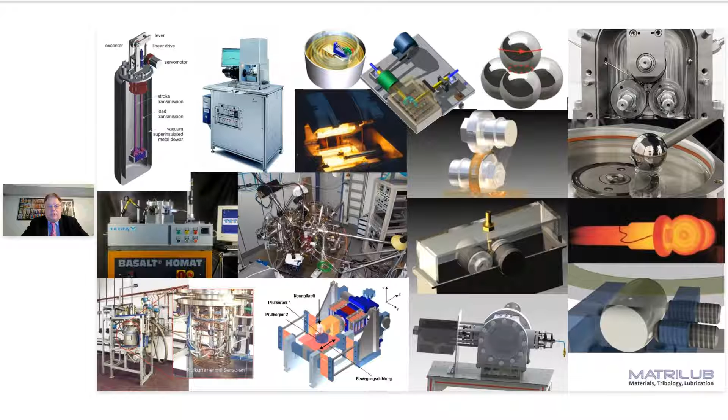The starting point is we have so many tribological test equipment flying around - test geometries, methodologies - that the question is why we need all these different test methodologies to characterize friction, wear, and load carrying capacity of lubricants and materials. The answer is quite easy: because we have such a large range of operating conditions and test geometries, and in order to have meaningful results you can transfer from a test equipment to the application, you need a lot of different testing machines to mimic those applications.

What happened in the last, let's say, 70, 60 years, is that some test equipment became standardized. This means that this test equipment or these test methodologies have reached a certain penetration and also acceptance. If you go back into the history, you'll see that the first tribometer may have been invented by Leonardo da Vinci, but the first tribometer where we can say you have a drive unit, you have something to measure temperature or forces, can be seen around 1850.

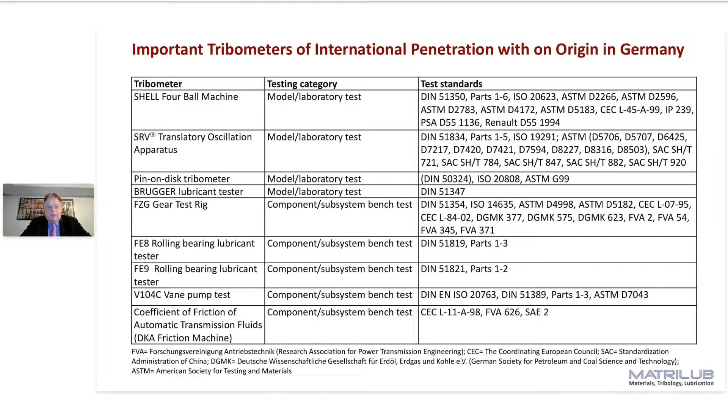Why do we now use test equipment? You can build a vehicle and test in a vehicle. This would be on top, category number 1, but this takes a lot of time. You need a full application, and it's costly and time consuming.

When you don't have an application yet, when you're developing for a future application, a lubricant or a material or a coating, then you must have a bench test or even a tribometer.

We have in Germany six levels or six categories. Categories 1, 2, 3 are application-oriented tests or practices, and then we have tribometers or lab scale test equipment up to small components, which are categories 4 to 6. But what is now the consequence?

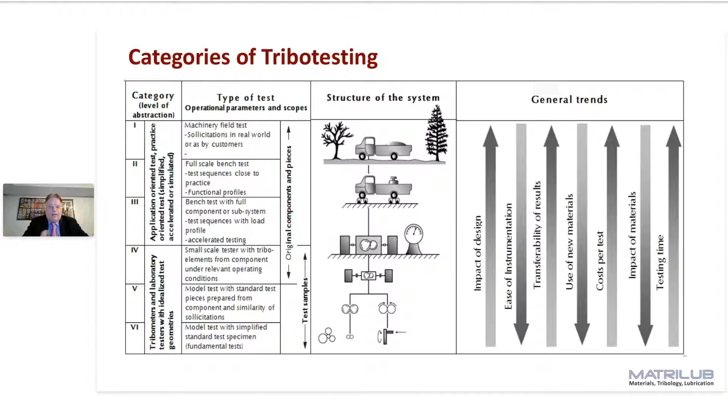Same for the testing time. If you make engine tests or vehicle tests, you need thousands of hours. In a tribometer, you can get meaningful test data after some hours about the functional behavior of a coating, a material, a lubricant, an additive, and also the interplay and interaction between these.

So what is a tribo system? The key point is that tribology or tribotesting is much more complex than analytical science, and the reason is that we measure a system property, or we measure functional properties.

Basically, friction and wear is everywhere in our life, in our industry. There is no industry where you do not have a tribo system. A closed tribo system consists, as you see in the center, of two tribo elements.

Tribo element 1 can be the primary part, and tribo element 2 can be the counterpart. At least in Germany, it is defined that tribo element 1, the primary part, is the element which is continuously in contact with the counterpart, while a surface element of the counterpart comes repeatedly into contact. This means a bearing shell in a sliding bearing is tribo element 1, and the rotating shaft is tribo element 2, because the bearing shell continuously touches the shaft, and a surface element of the shaft comes periodically into contact.

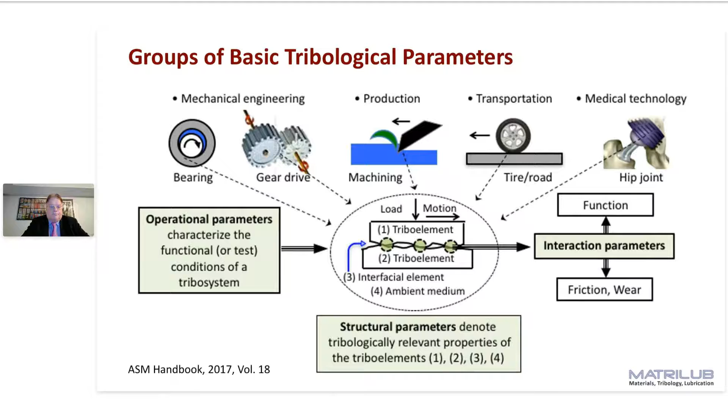A tribo system is a chemical reactor. You have operating conditions which go into the contact, and at the end you can have friction, wear, or a function coming out, and in between you have losses, especially heat from friction and also from wear particles.

Coming now to tribometry, you see here the bordered limits of a tribo contact in a tribometer or test chamber. We have two surfaces which come into contact. They are loaded, they receive normal force. Depending on the geometry and elastic properties of the material, this results in an initial Hertzian contact stress. You have a sliding speed or velocity, either rolling, slip rolling, or sliding, unidirectional or oscillating. You have ambient temperature and a test duration. These are the key parameters.

The outcome is, by means of a friction sensor at any time, the friction force. You can measure the wear of both elements, or of one element, by different techniques. Same for the temperature and also electrical properties like contact resistance, impedance, phase shift, permittivity, tangent delta, arcing, and so on. At the end of the test, you can use these specimens for surface analysis to see where the changes occurred.

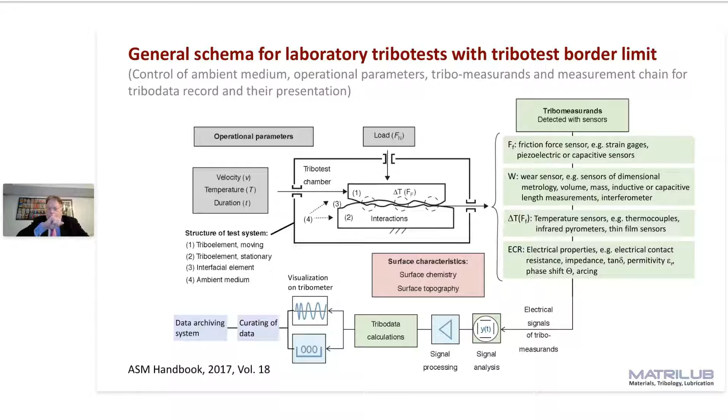At the end of the day, all these measurements are electrical or digital ones. They go into data processing, into a computer, and during the test and at the end of the test, these results and properties are visualized and shown on a screen. In the near future, the next step would be curation of your data. You must check if the tests were valid, if you have to correct data, and at the end the data will be archived in a data archiving system, which is more and more important in multinational companies who have globally different sites or labs operating different types of machines.

The real abraded volume can be completely different, and here comes the first problem in tribometry. Imagine these three wear scar diameters were generated with three different oils. You report the same wear scar diameter, and in consequence you conclude all three oils have the same wear protection. But in reality, if you use a stylus or optical microscope to determine the real wear volume, you see there is a significant difference in wear volume, so all three lubricants don't offer the same wear protection.

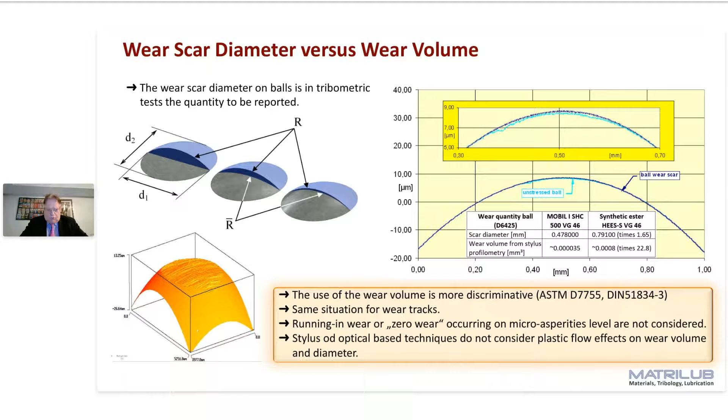So it is also possible to determine wear at this level, but here you have the problem: were the changes in topography caused by plastic flow of the microasperity, or really by an irreversible loss of material? So, finalizing—the first takeaway is that if you only look at the wear scar diameter, it can be misleading, and one should instead look at the wear volume.

If you look at actual research on super or supralubricity, you go down to 10 to the minus 3, and if you consider rolling friction, you go down to 10 to the minus 4 for the coefficient of friction. This makes it complex and complicated from the metrological point of view to mimic all in one test equipment, which is nearly impossible to do. This gives you an indication why you need so many different test equipment or test machines which can be adjusted for different load ranges.

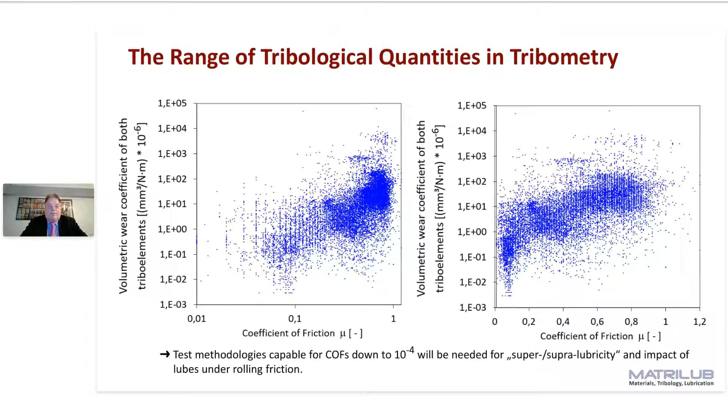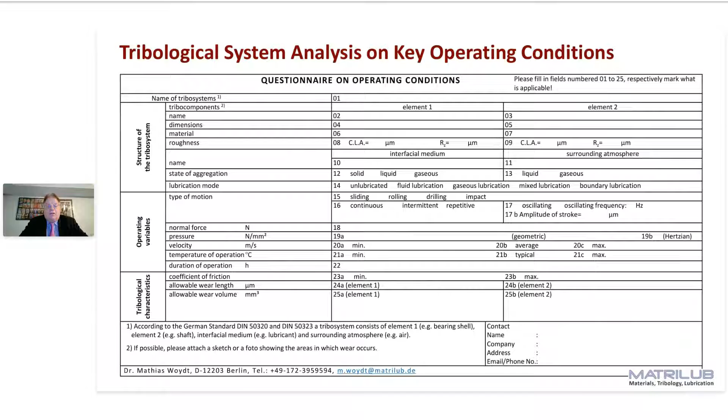So if we go back to these diagrams, you see a wide range of friction coefficients and wear rates. The question isn't whether a test result anywhere is good or bad, but whether the test result meets your tribological system analysis. If you have an allowable wear rate, all test results should be below it. So by selecting results, it's not a question of good or bad. The only question is whether you meet or do not meet what you analyzed through this questionnaire.

A very important point in tribotesting is the so-called overlap ratio. The overlap ratio, epsilon, is a ratio between the permanent contact area, in this case the red area of a flat pin, divided by the total contact area, which is the wear track on the disk. One tribo element is in contact all the time, while a surface element on the rotating disk has some vacations during the test.

What happens is better shown here. You have the contact zone. In the contact zone, the tribofilm or the oxides, whatever may have been worn, come out of the contact, and in this contact-free time, this can be regenerated, replenished. It's logical that when you increase the speed, you may come into a situation where you wear more of this tribofilm than it can rebuild. This also explains why often you have an impact of the sliding speed on test results.

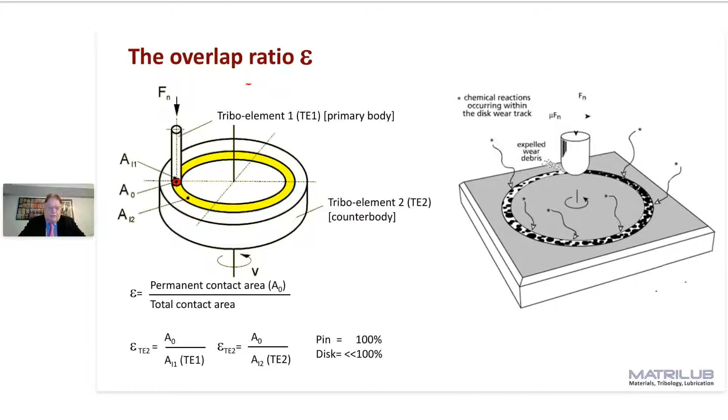At a certain point, you have a low wear, high wear transition.

One outcome from the tribological system analysis is the so-called PV diagram. PV means a couple can afford a certain product, a certain combination of pressure - contact pressure times sliding speed, and we mean here not rolling speed but sliding speed in meters per second. If you look into this schematic diagram, all lines or regions represent a transition border from mild wear or low wear to high or severe wear.

It means even at a very low speed, 0.01 meters per second, there is a maximum nominal contact pressure you cannot exceed, because the material begins to flow in the tribo contact. Even with very low contact stress, if you go on the x-axis to high speed, 10 or 20 meters per second, you cannot exceed this sliding speed, because the microasperities may melt, evaporate, or creep. So you have two border limits which can be predicted, and in between you can exchange pressure and velocity.

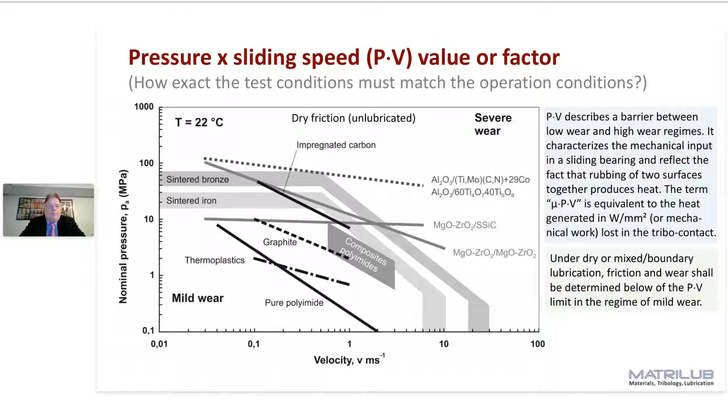This means you don't have to exactly match the operating conditions in your application, but you must be sure that during your test you are in the mild wear region of the couple with respect to the application. When your load, speed, or PV value in your test equipment is too high and you are under severe wear, you can never have results which can be transferred to an application. So it's important to know these PV values of a material, a couple, a lubricant, and you must not have exactly the same PV value in your tribometer - but you must at least be in the region of mild or low wear.

But how can you identify such a transition, such a critical contact stress? Here's an example: a pin on disc test at 400 centigrade, 20 kilometers, in hot steam. You have a point contact, and on the y-axis you see the total linear wear, which has a certain curve. But the wear volume doesn't go linearly - it goes with the fourth power of the wear scar diameter, or the wear height, divided by the diameter of the ball.

If you convert those curves, you see that at a certain point the wear rate becomes constant, meaning from this point onward you are in the low wear regime. When you start such a pin on disc test with a ball, you have high contact stress at the beginning, you get wear, the surface gets bigger and bigger, and the contact stress goes down automatically. So when you have a linear wear measurement in a tribometer, you can identify this critical contact stress where you have the low wear to high wear transition.

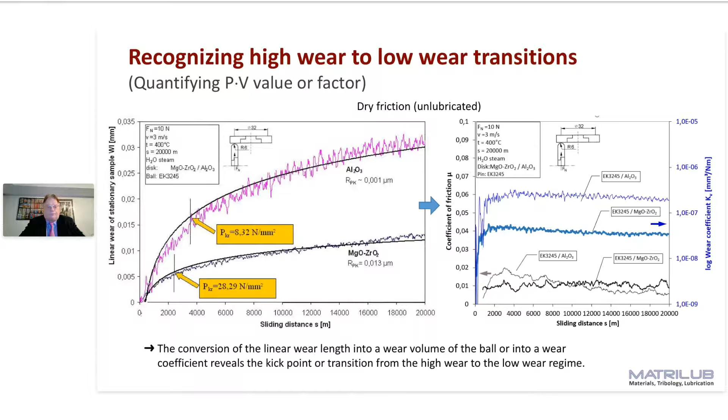Okay, another important point, especially under dry friction but also in some cases under lubrication, is relative humidity. At least under lubricated tests, you should record the humidity. Under dry conditions, you must really control the humidity. You see here in an oscillating test under dry friction with ball bearing steel, the wear rate or wear coefficient as a function of relative humidity. Your results can be tailored by the humidity, and depending where you live and the season, you can get different results.

Here on the top right, you see also dry oscillation tests with two different materials - stainless steels. Until 10-15% humidity, friction is independent in this case, but when it gets dry, friction drops. This can also be embarrassing in an application when you sell something into a very dry region - you have designed a frictional contact with a friction coefficient of 0.8, but in this dry region it drops down to 0.5. Or in the other case for ball bearing steels, when it gets humid, you have a drop in the coefficient of friction.

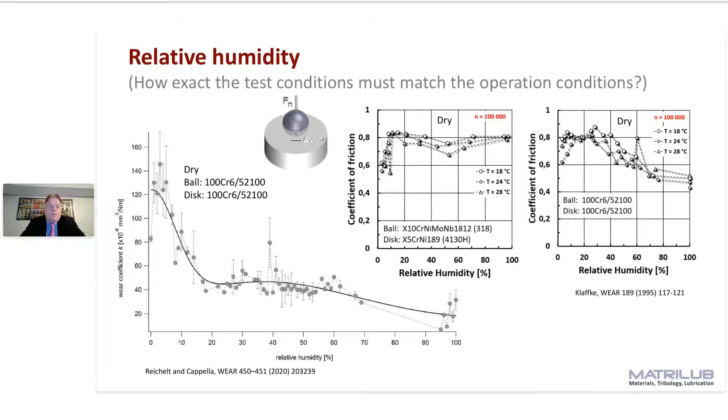So it's not only important to have constant and defined test conditions - you should at least measure the relative humidity - but also, if you want to apply your results to an application, you should know the impact of humidity on your friction couple. Otherwise you will have claims from customers saying it's not working, while other customers don't complain. The reason was simple: friction and wear depend on humidity.

Question of testing time. How do you come to the right testing time? This is not an easy question.

Most pin on disk test methods have 1,000 meters of sliding distance, or 100 meters. 100 meters is certainly too short.

And you see here's a problem. You have three evolutions in the wear. You have one evolution which goes straight. You have another one which starts slowly and accelerates. You have one with a high running-in wear. You reach the critical contact stress, and then you come into a low wear regime.

If now you would have had 19 kilometers of sliding distance as test time, you would conclude all three couples have the same wear resistance. But this is not true. If your testing time is too short, 1,000 or 2,000 meters, you would say couple number 3 has an unacceptable high wear. We take couple 1, but this result is also not true.

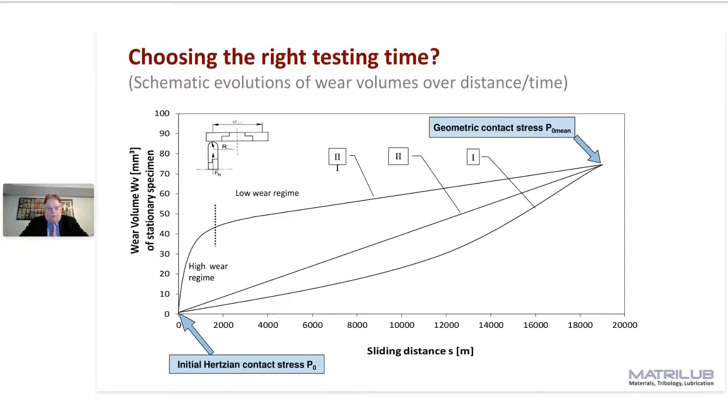So to find the right testing time, I prefer always to have longer testing time and to have more test machines than to have too short testing times, which can really mislead.

Another problem is the mapping. If you look at the range and variety of operating conditions, just to have one set of test conditions is not good to have a safe characterization of the functional profile of a tribo system.

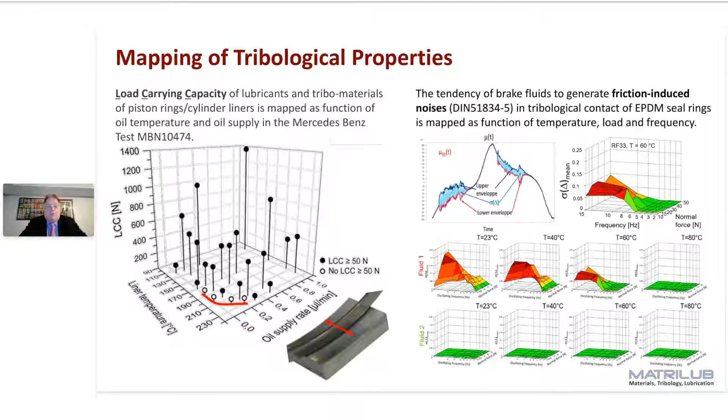The electrification is a new demand which comes onto fluids. We have today demands on reliability, life, against fretting, frictional properties, oxidation resistance, corrosion protection. And now these fluids get new additional demands on heat transfer, material compatibility, and electrical properties.

The material compatibility comes from the situation that the fluids have now contact with much more different types of materials than previously. And the electrical properties come from the fact that they are, in most cases, generated by magnetic fields in electrical drives, not only in vehicles, but also in wind turbines.

And these parasitic currents impact the tribofilm and can oxidize the lubricant, can have arcing and so on. This is quite a new demand, and for this we need tools.

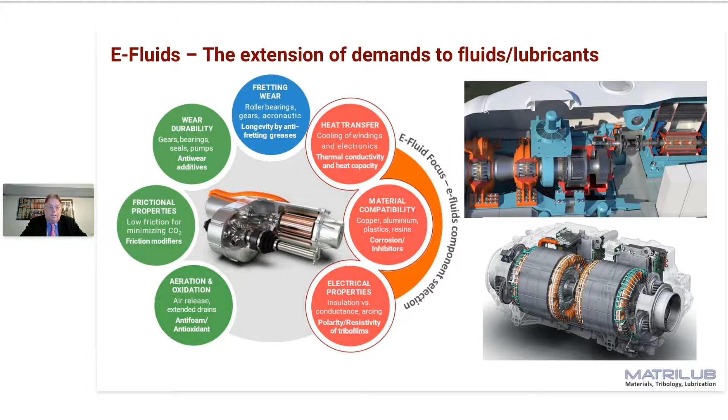So when you run a mini traction machine test, you record the impedance. Impedance automatically means it is an AC current over the frequency. Then during the test, when you increase the sliding speed, with the same fluid, you go from a low resistance to a high resistance because you form a film, at least a hydrodynamic film. So you already have the range from ohmic situations to capacitive situations.

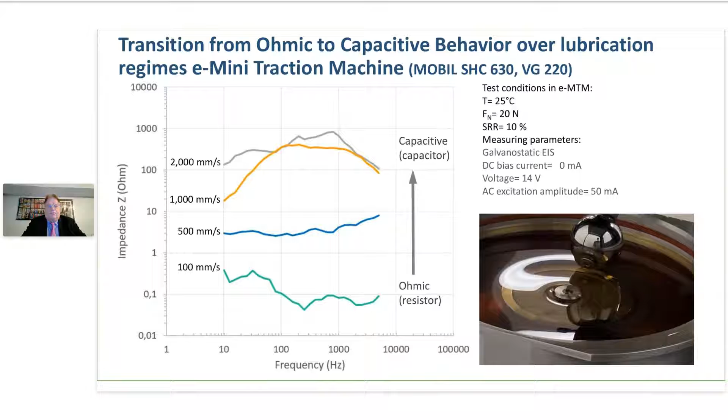This also depends on temperature and on testing time, because on the rubbing surfaces, a tribofilm with completely different properties may be formed. If you make now a 4-ball test, you have a similar situation.

In a classic 4-ball test, 400 Newton, 1 hour of test, you see the evolution of the coefficient of friction, the evolution of the temperature or friction torque, and the contact resistance. For a long time during the test, nothing happens, and suddenly the contact resistance increases because a specific tribofilm is formed. This is now really the debate of whether such a tribofilm formation is good or bad.

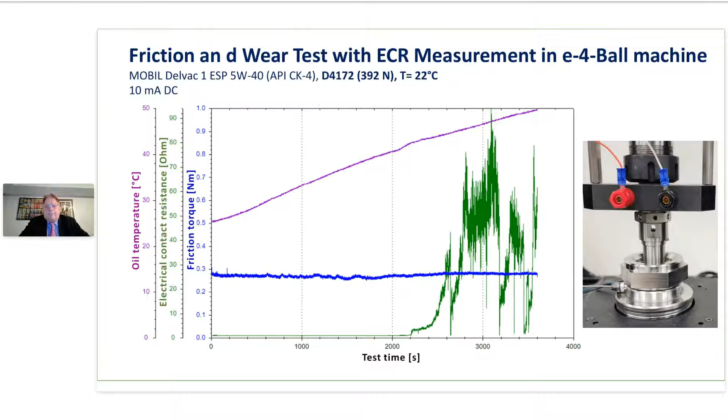At least for load carrying capacity and wear protection, it's certainly good. But in terms of electrical properties, the question is, when we have a build-up of electrical resistance on the surface, does it generate arcing and other properties which will degrade the lubricant.

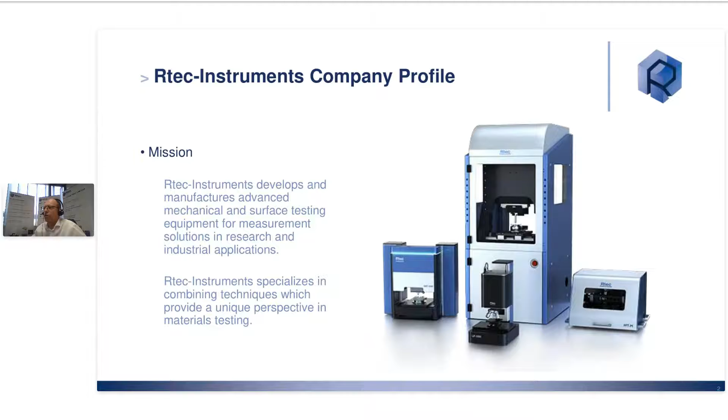We are a scientific instrument manufacturer for surface characterization, and we are developing and selling mechanical and surface testing equipment that combine different techniques in order to give a very nice overview about characterization of materials and lubricant for a lot of different applications.

The headquarters of Rtec Instruments are in San Jose, California, but they have a really worldwide presence, not only from Rtec Instruments offices in Europe and Asia, but also with a big number of sales channels and global partners that we have.

We have different kinds of instruments for characterization of surface and lubricants, going from multifunction tribometer, but also some mechanical tester and 3D profilometer, including high pressure tribometer, rolling sliding tribometer, air jet erosion. So specific applications in the field of tribology and mechanical testing.

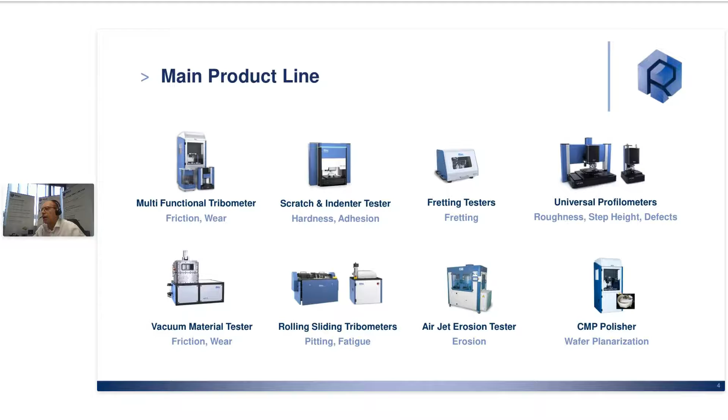But what I would like to pinpoint today is more the focus on lubricant testing. It is true that we have some standalone instruments which are able to characterize lubricant and grease with a specific mode of testing, like SRV tester, 4-ball HFRR, or pin-on disc tribometer that was presented very nicely by Mathias Woydt as well in his presentation.

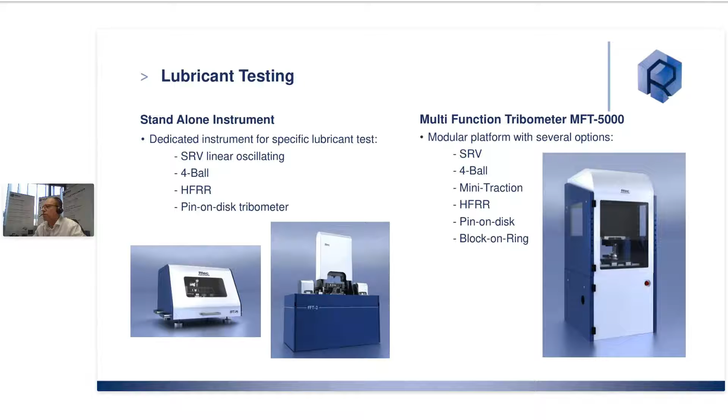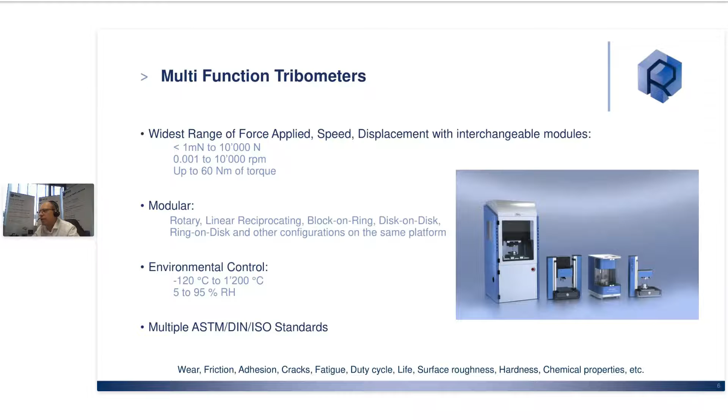But we have the unique modular platform of MFT 5000 multifunction tribometer that allows us to characterize a very large range of applications on this kind of platform. And with the universal platform that we have, we can go from very small force to high force, from low speed to high speed, in order with a specific module of testing to characterize lubricant for a very specific application.

It is true that on a multifunction tribometer, we have very dedicated options for lubricant testing that go from pin-on disc, 4-ball, and other oscillating linear modes of testing. And of course, there are specific accessories for lubricant testing, of course, the lubricant container, the accessory.

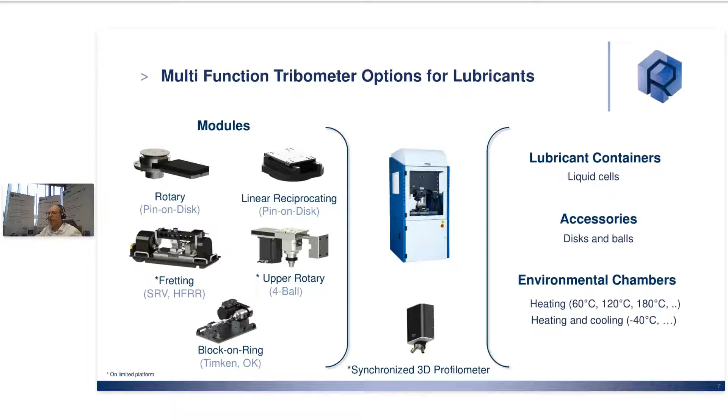And it's true that recently the option of electrical contact resistance and impedance measurements has been growing very, very strongly in all ranges of applications. And we will release in the near future an application note on electrical contact measurements combined with lubricant testing.

What is a unique option as well is a combination of 3D universal profilometer, including white light interferometry or confocal microscopy, in order to characterize the 3D deformation and specifically the wear volume on material, either one of the disc and the ball, in order to really have a complete overview of what would be the real wear on material.

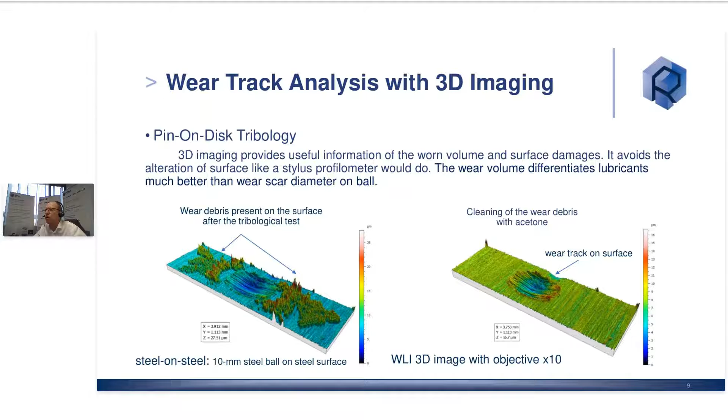We can have a very nice image about presence of particles, complete wear volume evaluation on the surface of the material. It is true that when we are going into lubricant testing, there are specific modes of testing that are generally related to ASTM and ISO standards. Pin on disc tribometer, which is sliding condition of ball on disc tribological tests, which are really well known in the field of tribology, but there are other testing methods extremely important for lubricant testing.

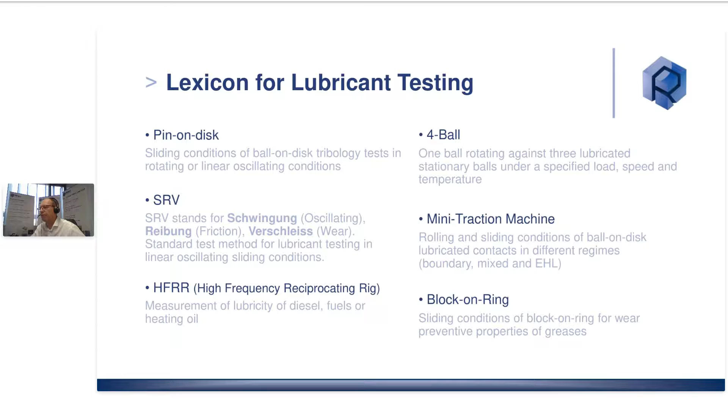Going from the SRV test method, HFRR test method for lubricity of diesel and fuel, the 4-ball testing, the mini traction machine, which has been growing interest in our application, also related to electrical contact resistance and impedance measurements, and for some applications as well, the block-on-ring test.

Just to give you a small overview, the fretting module allows you to do SRV test, which is a high-frequency linear oscillation test. You have basically a ball in friction in a linear oscillating way, which is a standard method that is relatively well known and standardized.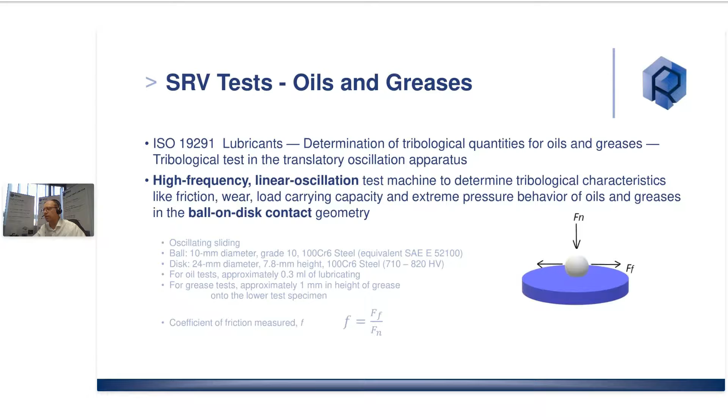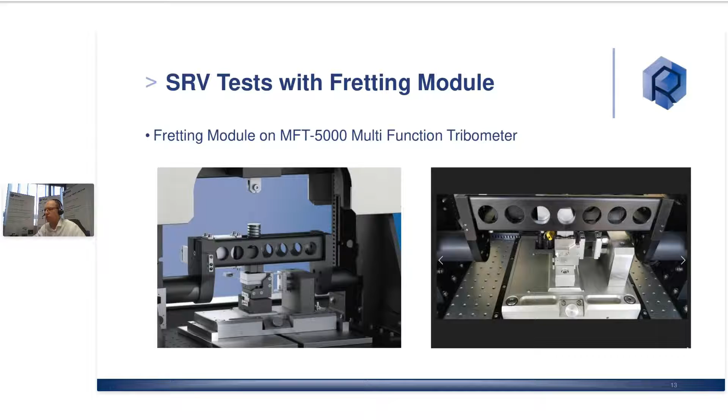With this kind of testing method, we have in reality a very dedicated instrument. The fretting module has a very specific feature in order to do very precise measurements on a linear oscillating way. We have a real-time normal force control with the applied force, which is well controlled with the software for precise measurements during the test.

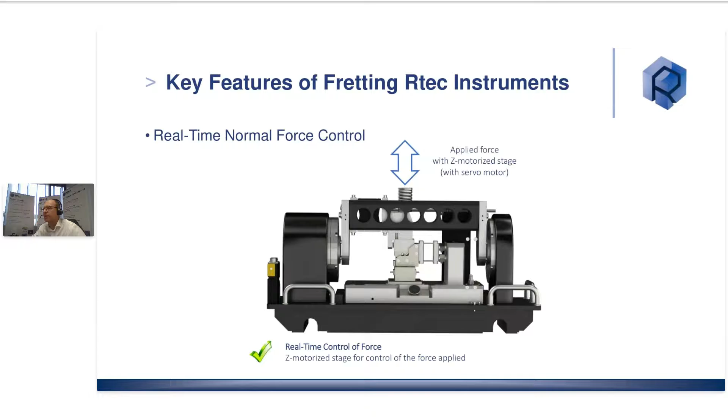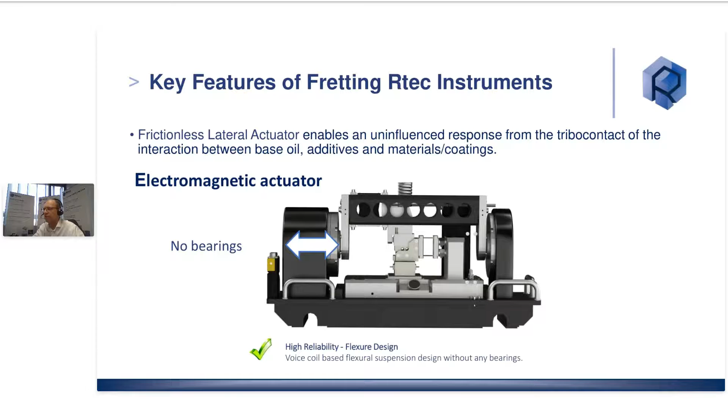But what is the key feature of this kind of instrumentation and design is a voice coil with an electromagnetic actuator in order to have a linear oscillation with no bearings and no friction generated by the instrumentation itself. If you are interested in more technical detail, we would be happy to explain the real specificity of this kind of fretting test.

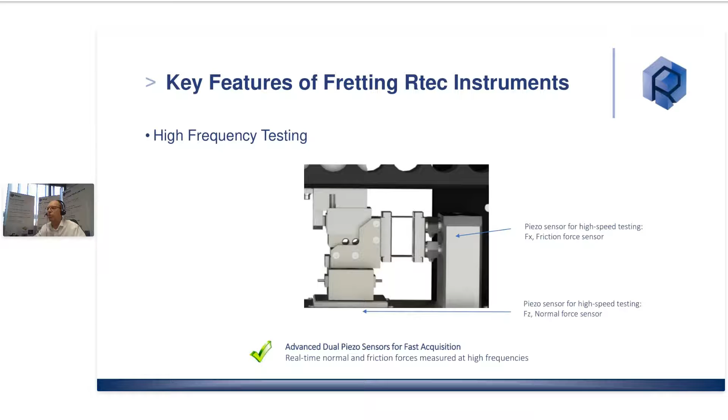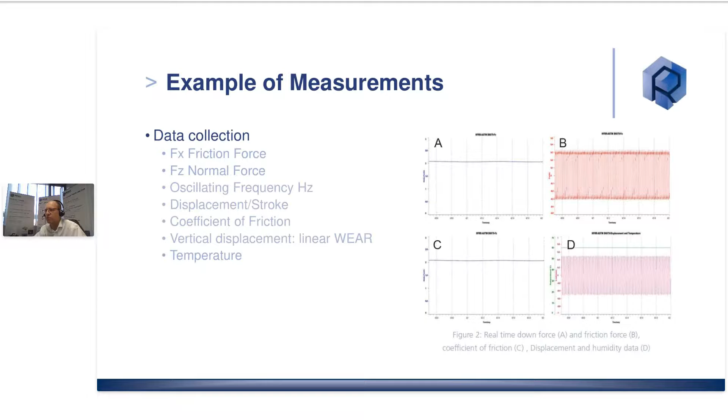We use, for example, a piezo sensor to do high frequency tests and have a very precise and fast acquisition of the coefficient of friction and the friction force. In this instrumentation, we measure the normal force, the friction force, the oscillation frequency, and the amplitude, and then we determine the coefficient of friction and the linear wear of the material, along with recording other parameters and sensors like temperature or electrical contact measurement.

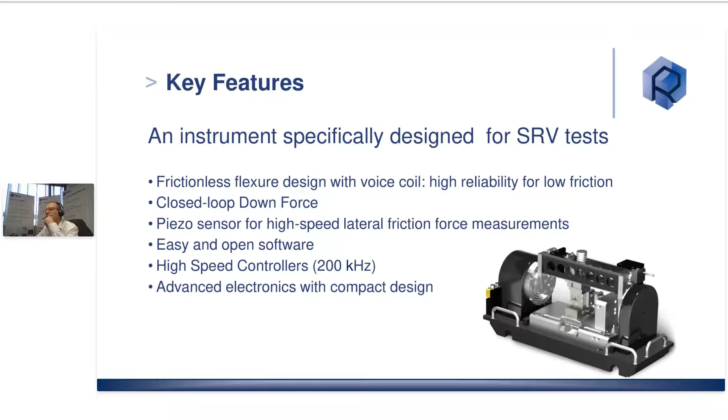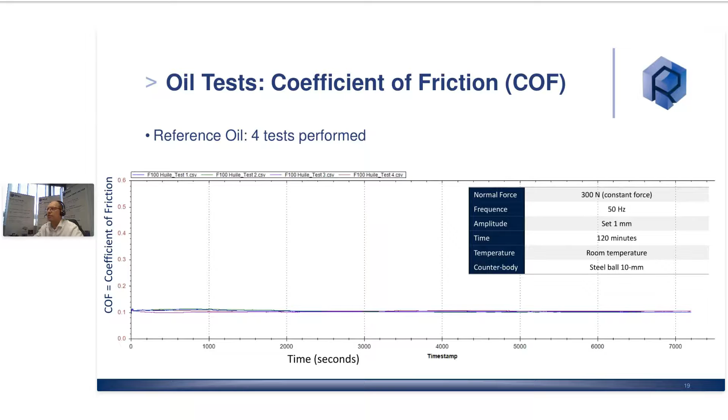For the linear oscillation test following the SRV standard, there is a very specific design to provide precise and accurate measurements on a very large range of applications. We are able to measure the coefficient of friction on a repetitive way on this kind of SRV test, where generally the frequency is 50 Hertz with a force of 200 or 300 Newton as an example.

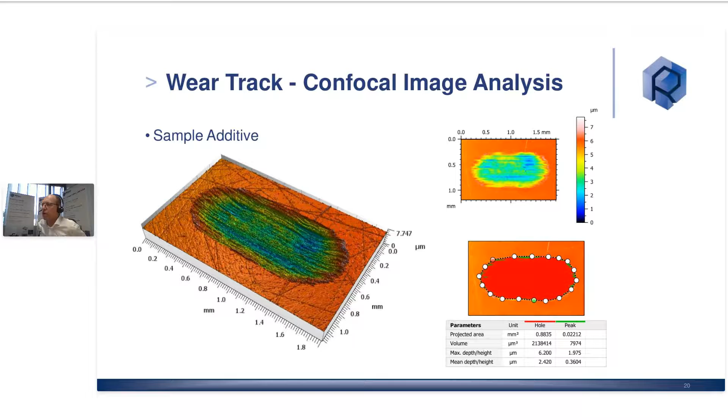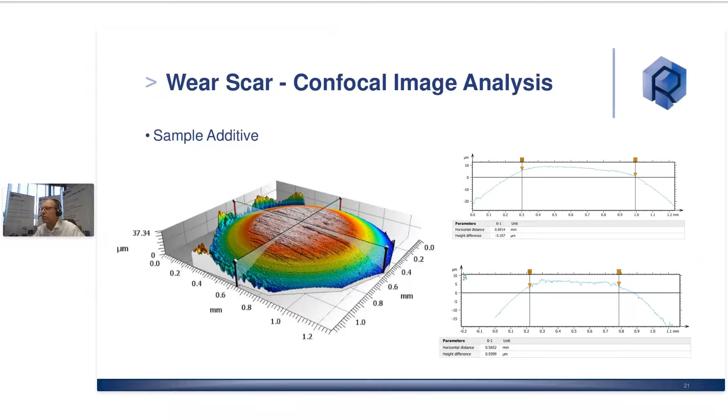It's very interesting to combine it with a confocal or white light interferometer microscope in order to, at the end of the test, evaluate the actual wear volume on the disc, but also the wear volume on the ball. All this combination gives you a very precise overview of the estimation of the properties of lubricant for specific applications.

The recent evolution in our instrumentation is also the mini traction machine, a specific setup that has become quite popular with EV testing and impedance measurements combined with tribology in lubricant testing.

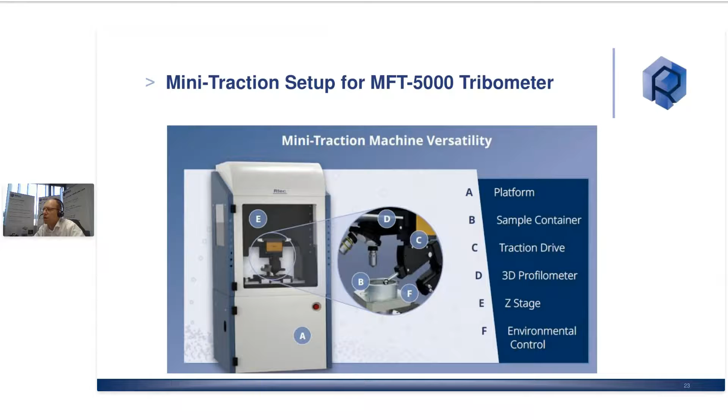On our universal platform, we are able to install a lower rotary drive, which does a rotation from the bottom, but also a ball rotation on the top. So here are some pictures to explain very quickly and simply how it operates.

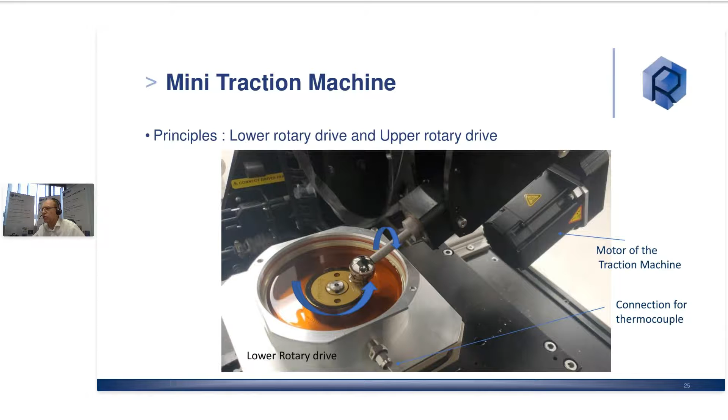Basically you have a ball on top with a load cell measuring the applied force. You have the disc in rotation, and a ball in rotation. We are able to control the sliding rolling ratio by controlling the speed of rotation from the disc on the bottom and the speed of rotation of the ball on the top, as well as having a load cell to measure the friction force and the normal force applied.

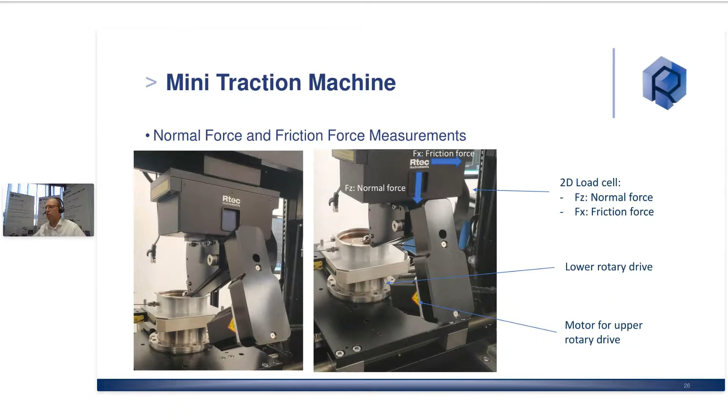We have different load cells to measure the normal force and the friction force, as well as the speed of rotation of the ball and of the disc on the bottom.

The interest of having this kind of option on a universal platform is that we have X and Y motorized stages to control very precisely the radius of the testing, as well as the Z motorized stage to measure and apply very precisely the normal force.

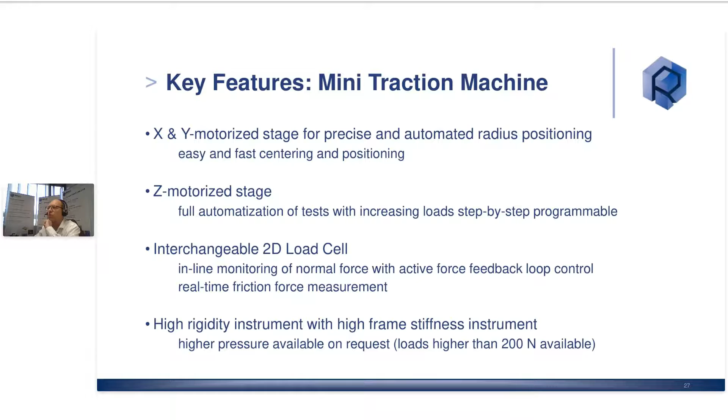We have a very large range of flexibility with this kind of instrument, and we could go to higher load and higher pressure by just changing the load cell on this kind of instrument. I will quickly finish on the 4-ball test, which is also an accessory on this universal platform.

We are installing what would be an upper rotary drive, which is a rotation from the top. It's following very precisely, in that case, the 4-ball testing, by having the rotation of the ball on top and the 3 balls that are on this bottom part.

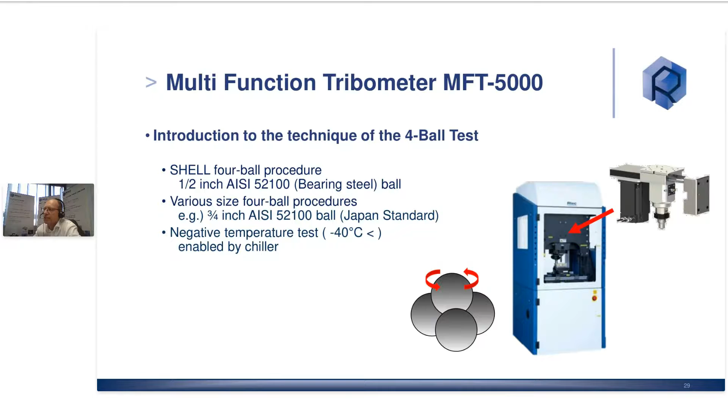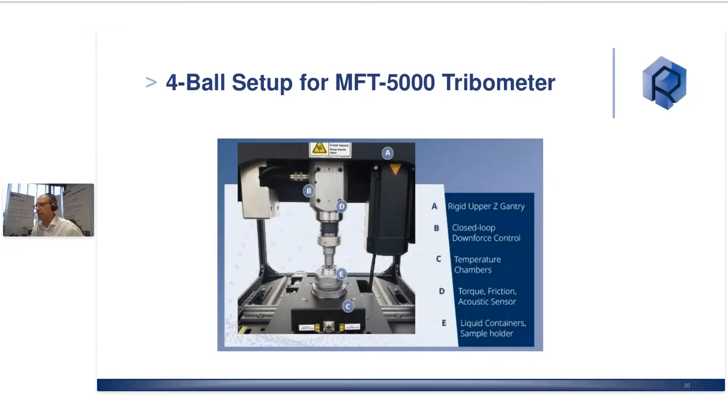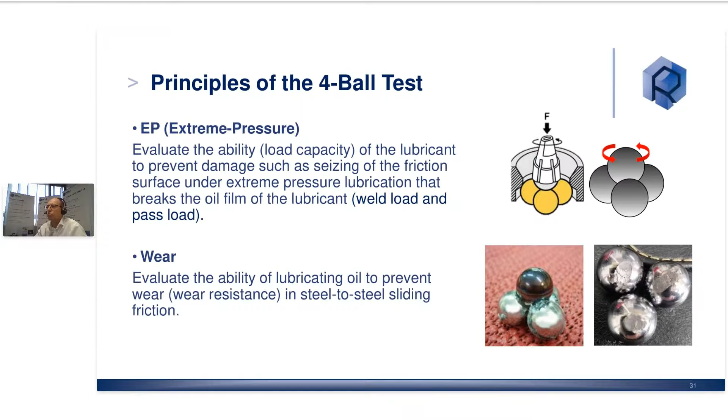I have a long presentation, but I will go very quickly because of the short time. If you are already familiar with the 4-ball test, this is done in a standard way, except the advantage of being able to control the normal force applied in an automated way. So it's very easy here to do testing at relatively high pressure, to follow the EP pressure standard test, or to do evaluation of the wear of the ball by using other parameters.

We can go from very high pressure to lower pressure, and also with some accessory of temperature heating in order to control the temperature and do testing at different temperature ranges, going from cooling to heating.

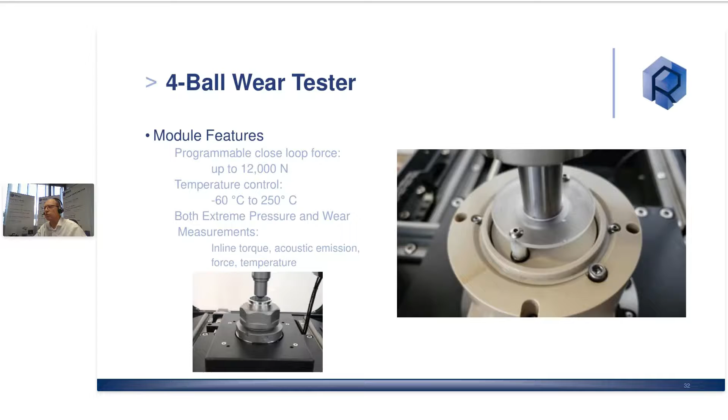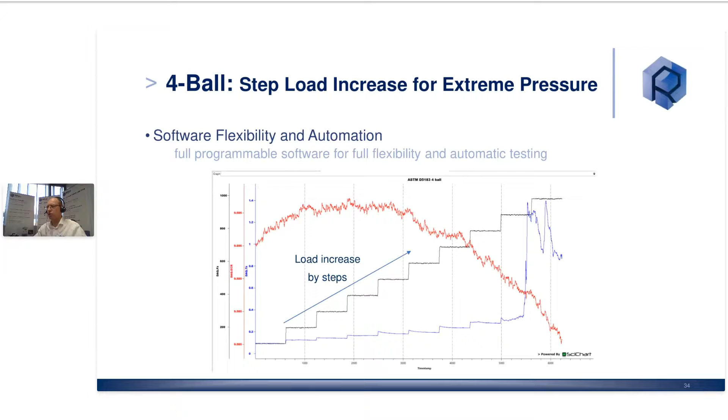So the big interest of this kind of automated software is the capability to automatically increase the pressure or the load in an automated way. So you can go from 100 Newton to 1,200 Newton step by step, by doing automated increase of the pressure with the software.

And of course, you can combine it with a confocal microscope in order to precisely estimate what would be the wear volume on this kind of worn sample.

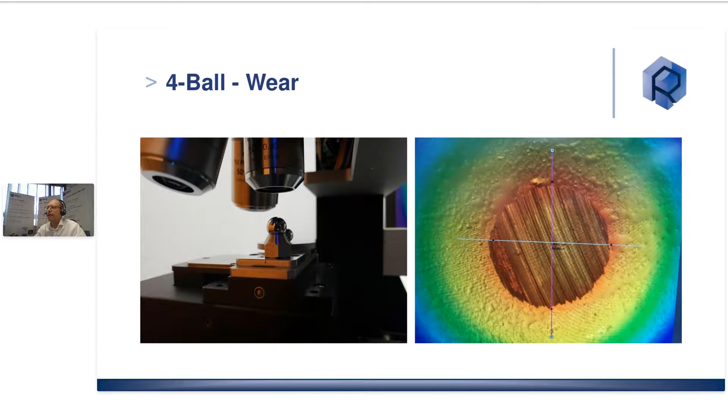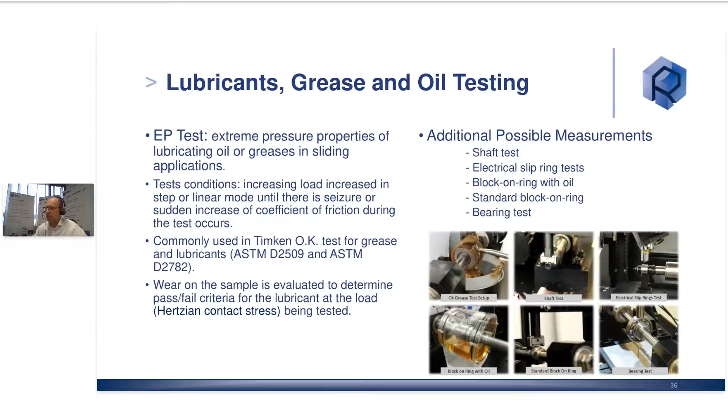There are, in reality, other methods of testing, with a block-on-ring for grease and lubricant that I will not explain today, and pin-on-disc tribometer as well, which are methods of testing that we are providing with this kind of instrumentation.

It is true that when combining lubricant testing with tribology, there are many requests for different geometries of testing, and we would be very happy to discuss with you about your needs and requests for testing.

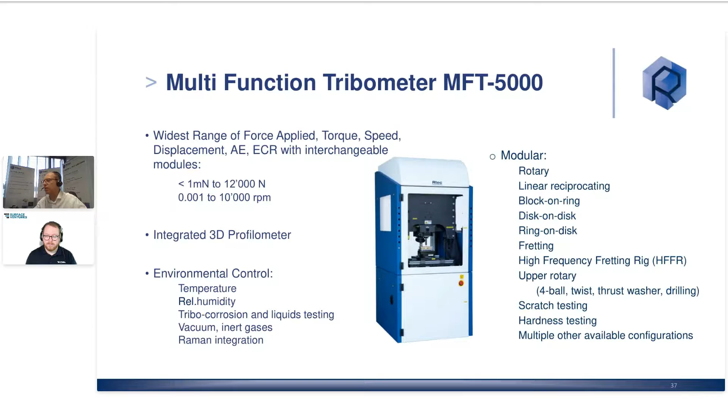The recent evolution in our Rtec instrument has been to combine all these kinds of options with impedance measurements. And it shows that for the development of new fluids and electrical vehicle testing, this has been requested very strongly for the past year.

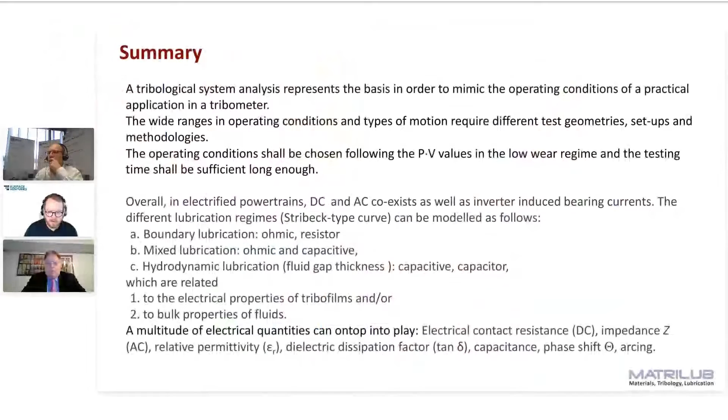Got it, thank you. But I have some more details which were published within this working group. Okay, got it, thank you.

Proceeding on to the next question, from Yanga, I hope I'm pronouncing that correctly, probably not, apologies. Is there a commercial tribometer especially designed for current carrying friction? So perhaps a question for the both of you to answer. I'm not sure if I understand this correctly, maybe a translation issue. I understand this as the person talking about arcing.